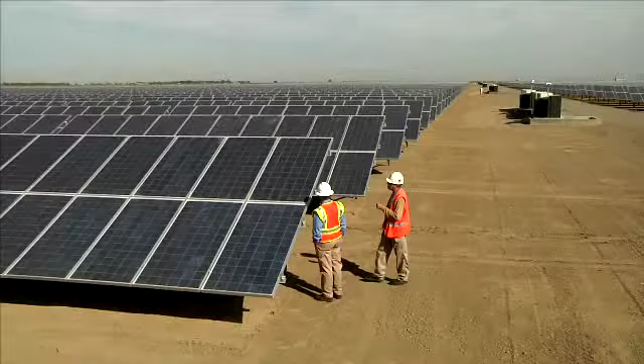On this edition of Our Green World, a company that specializes in storing renewable energy to help create the smart grid of the future.

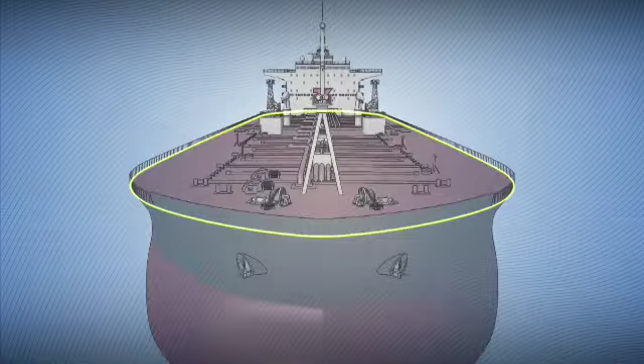Researchers show us the chemistry that makes our green living possible. But first, we take you to Vancouver, Canada, where the shipping industry has introduced a new design for the most energy-efficient ship on the seas.

Ocean shipping is the lifeblood of our global economy, but with the greening of the industry, future shipping is likely to be dramatically different than what it is today, especially for the next generation of tankers. Shipping overall is just such a huge industry, with 50,000 ships and 1 million seafarers transporting 90% of the world's goods. It's a big global industry.

And while it's one of the most efficient from a carbon emissions standpoint relative to other transportation methods such as rail or truck or air, as an industry we want to constantly evolve and have a smaller carbon footprint.

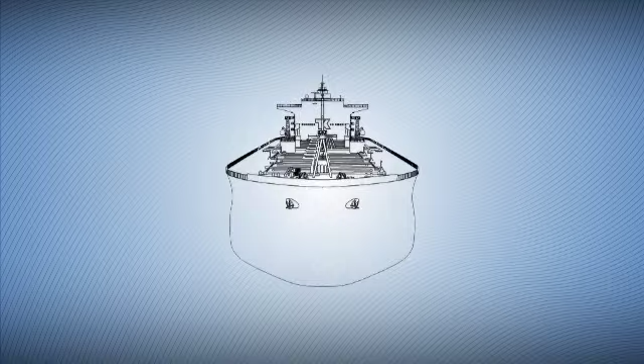New environmental legislation is underway, and shipping prices continue to rise. Since 1999, fuel prices have risen by over 500% and are now the greatest cost a vessel will incur over its lifetime. This means innovation in shipping is crucial for the future.

Fuel costs are every ship owner's number one cost. For example, if we were to order a new ship for $50 million, we would spend $250 million or more in fuel over its lifetime. So it makes economic sense as well as environmental sense to try to save fuel.

In the last decade, for sure, we've seen much more focus on the environment, and I think we've also seen the rising cost of fuel. And if you put those two together and take into account that we haven't seen any innovation, then it seemed like the perfect time to really start thinking about how you could do things differently.

As a world leader in shipping design, Teekay Corporation has taken upcoming emissions legislation and high fuel costs not only as a challenge, but as an opportunity to build the most energy-efficient ship possible, the One Spirit, an eco-design that reduces fuel consumption by 30%.

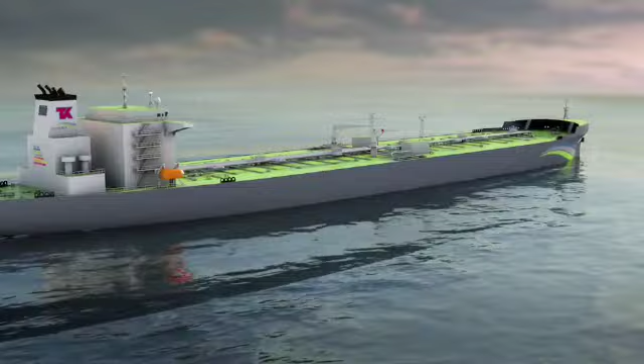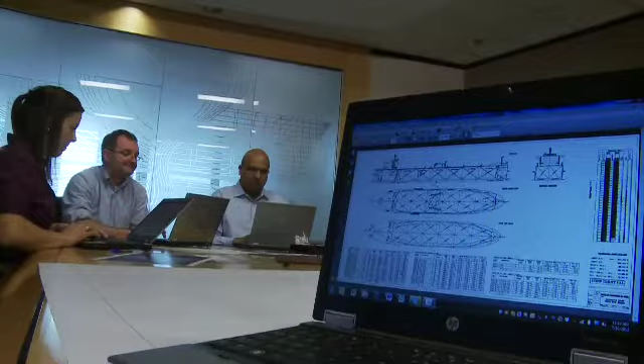While other shipping companies have developed eco-vessels by tweaking the design or doing simple add-ons like paint, Teekay took a far different approach by starting over and going right back to the drawing board on vessel fundamentals, here at its Innovation, Technology and Projects Unit in Vancouver.

So it made sense to go back to look at vessel design and alter it so that we were able to minimize the total life cost of the ship. So that's exactly what the team did.

Back in 2006, the project started off, and I think it showed great foresight by the project team, because they were able to look ahead and say, well, we don't believe fuel price is going to come down. If anything, fuel price is going to increase. So it makes sense to start to look at this project now.

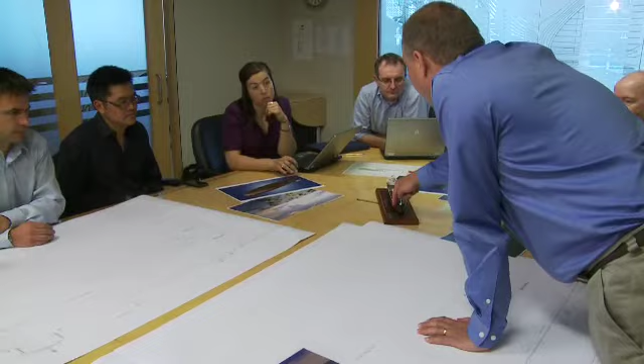And for a vessel design, it makes sense to go right back to where the rubber hits the road, so to speak. So we went back and we looked at the hull form, because that's where the ship interacts with the water first, is the shape of the hull. So if we were able to optimize the shape of the hull, then it gives us a very good platform to start to look at other innovations and other ways to reduce the fuel cost associated with the ship.

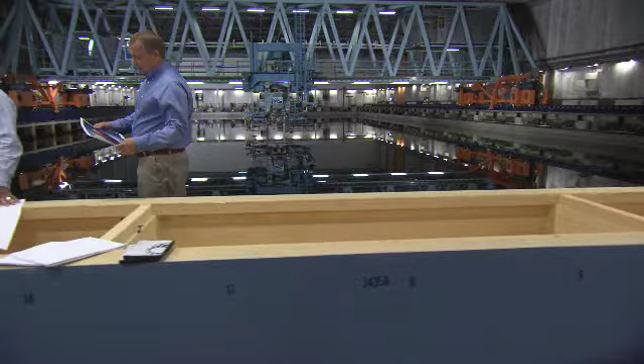Teekay then partnered with a world-renowned team of technical experts to create the tanker's ultimate design, undergoing rigorous tests at its testing facility here at Chalmers University in Gothenburg, Sweden.

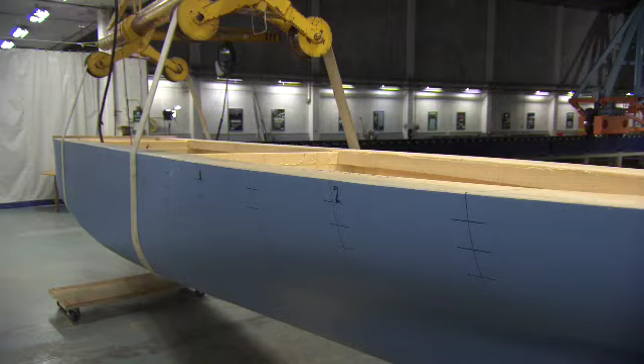You can only take it so far through paper and tabletop. We went through some computer development work, and that work indicated that we were heading in the right direction. But you can only go so far with that.

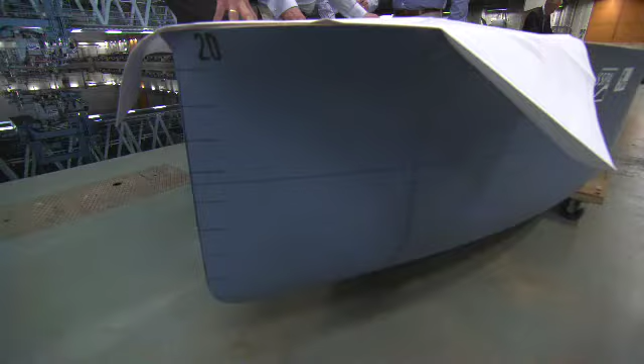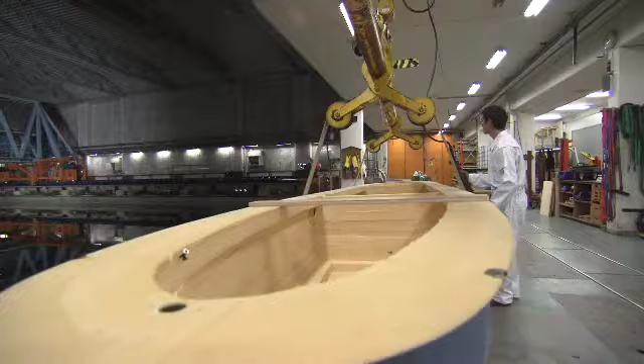What you need to do is put this into the real world. And to put it into the real world will cost a huge amount of money. But there are facilities such as this one behind us, where it allows you to build a scale model, put it in and start to see how it's reacting, and see if you're getting the savings that the computer indicated you were going to get. And that's what we're doing here today.

Well, because you have a facility here that allows you to simulate the exact same conditions, whether that be a hurricane or calm conditions, that you're likely to experience at sea. The end result is a tanker for the future called One Spirit.

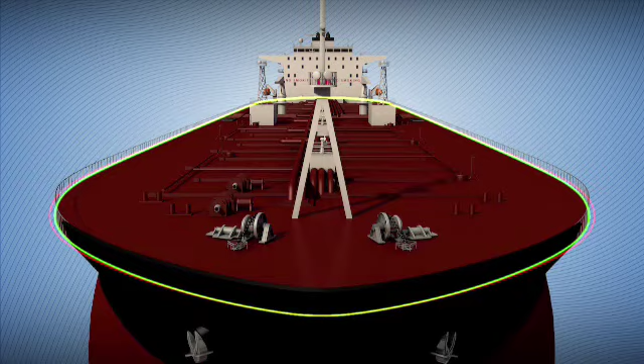This focuses on 3 key design innovations, starting with the all-important hull of the ship, for which the team ran over 40,000 simulations to find the optimal design that reduces resistance for a given cargo capacity.

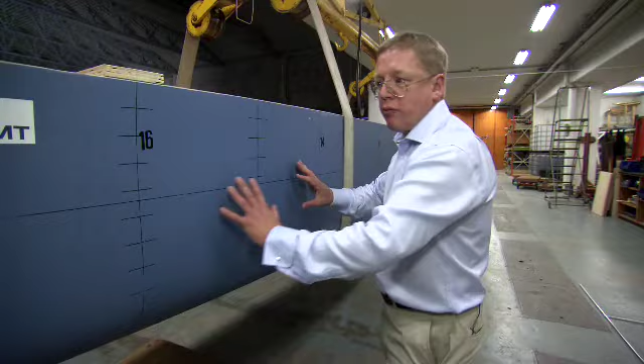On a conventional tanker, this portion is actually quite full, and the wave that comes round can dip down quite a lot, followed by a breaking wave. What we've done is made this portion much more gentle, so the wave coming around the corner manages to come back up without breaking. That contributes some 2 to 3% of the savings.

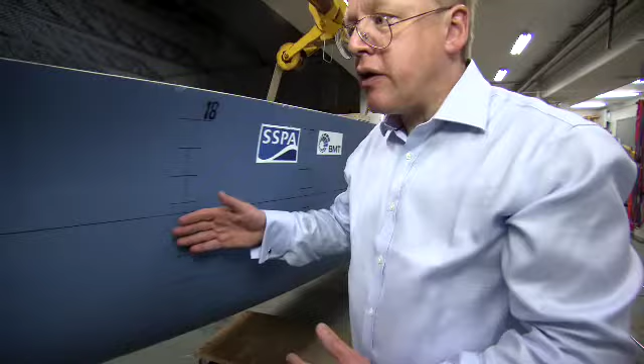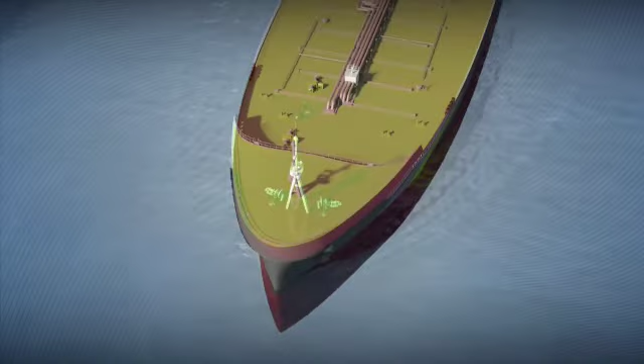Putting this all together, the savings in calm water are around 11%, with additional savings in a seaway due to the reduced added resistance in waves.

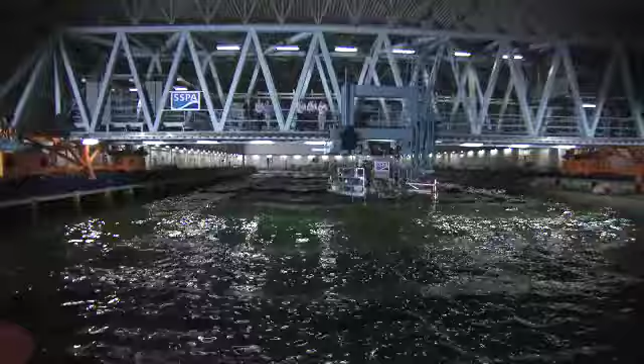By narrowing the beam of the ship and streamlining the bow and stern, the design team created a sleek new form that by itself resulted in over 10% fuel savings, while maintaining the cargo volume of the ship by increasing the hull's length and depth.

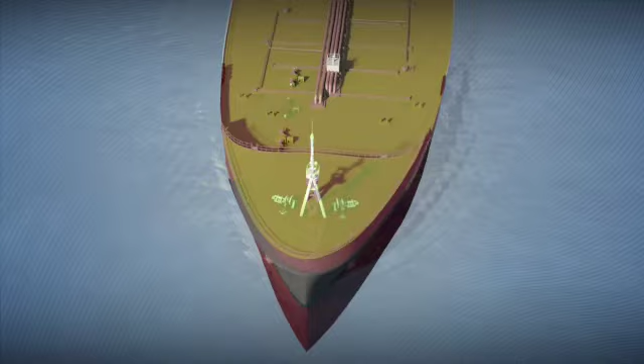The key thing about cargo carriage is it all comes down to $1 per ton or $1 per barrel freight cost. The quickest and single driver we can put in to reduce the $1 per barrel freight cost is to reduce the cost of the bunkers. And the fact that this ship is more environmentally efficient, significantly more environmentally efficient, it burns less fuel, has a direct impact on the landed cost of the cargo.

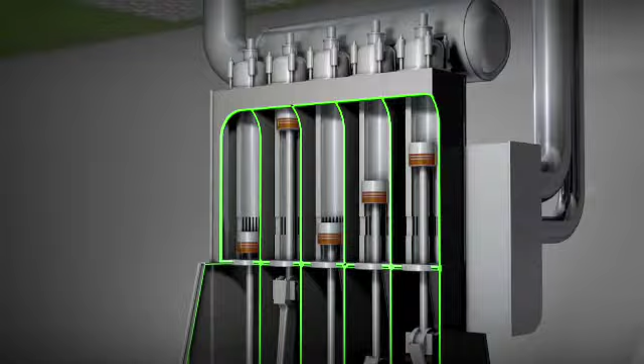The second innovation was adding a larger, more powerful G-type engine to the tanker, with increased capacity to slow the combustion process in order to recover more energy from fuel. So what we're willing to do is pay more money for a bigger engine, but that allows us to derate the engine, minimizing the fuel consumption.

The energy savings associated with this are sufficient to power 2,000 homes or to power 700 cars every day on the road. And if you expand that up into a fleet the size of Teekay, it's the equivalent of 42,000 cars being taken off the road every day.

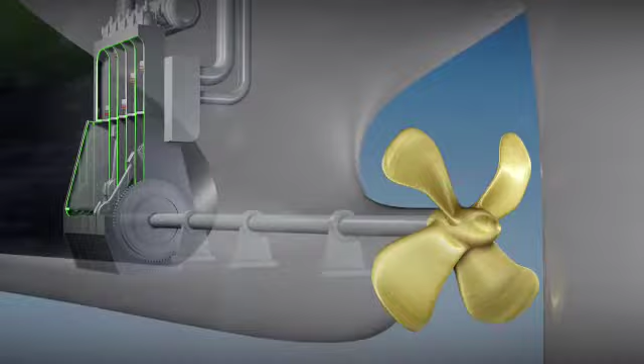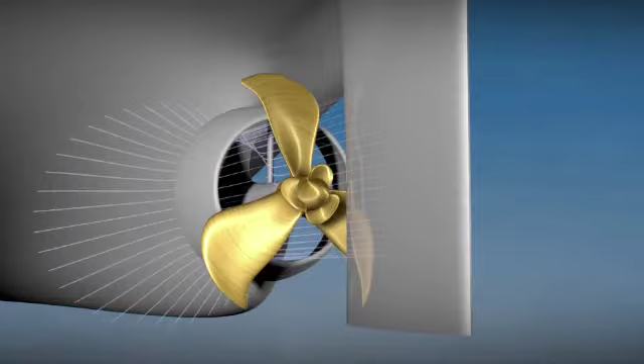The bigger engine and slower shaft speed resulted in a third important innovation: increasing the diameter of the propeller and reducing the number of blades from 4 to 3 to more efficiently move more water with each rotation. The basic thing we wanted to do was have as large a propeller as possible, because by the simple laws of physics, the larger the propeller, the more effective the propulsion.

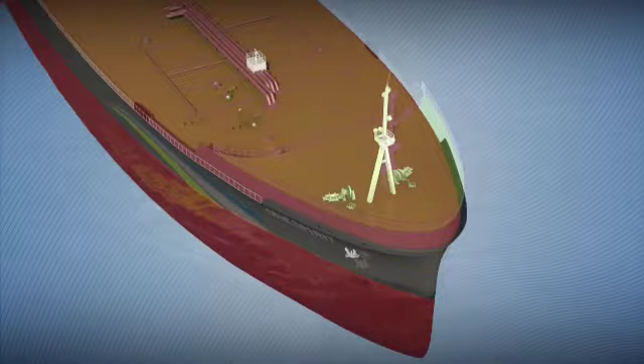Altogether, we have these 3 factors: the improved hull resistance, the improved propeller efficiency, and the improved engine efficiency, that have fitted together into what I would call a fantastically positive design spiral.

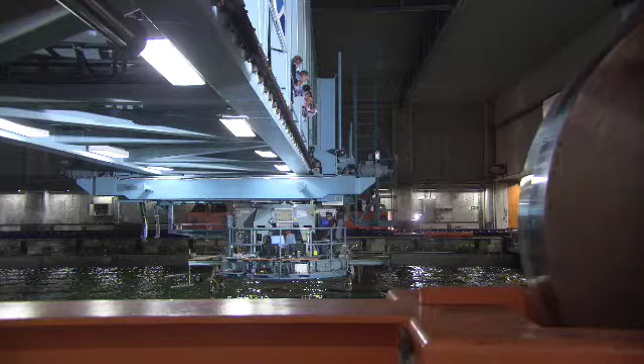This team and these 3 design advancements have all come together to create One Spirit, Teekay's newest green tanker, and the most efficient vessel in the shipping industry, with over 30% fuel savings.

This project is a hydrodynamicist's dream, to be approached to do a blank sheet of paper design study, and we've come up with what we feel is a world-beating solution.

Shipping is already the most efficient form of transportation out there. And what this ship does is take that and improve it - another 30% saving over what is already the most efficient form of transport in existence.

That's important to One Spirit customers like Teekay Tankers, with its fleet of vessels that transport crude oil around the world. Our goal is to provide energy to the world by being a leading provider in marine transportation. This ship that can save 30% in fuel will benefit our customers, our shareholders, and the environment. And so it makes just good business sense.

One Spirit may be the only green vessel of its kind, but it represents the next generation of tankers.

Renewable resources like wind and solar may be the symbols of green energy today, but harnessing and storing that energy is the key to powering our green world, and ultimately creating the smart grid of the future.

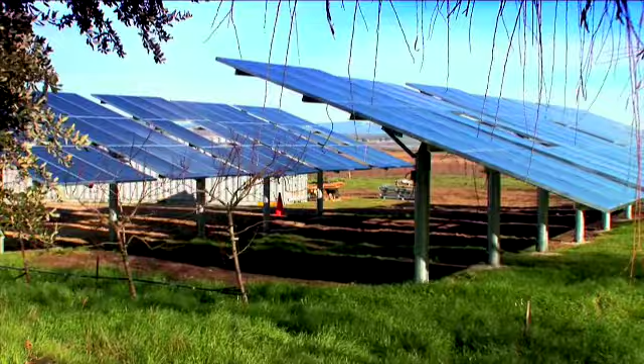Storing wind or solar-generated power is very important because both of those resources are intermittent. The sun shines through a few hours of the day, the wind blows intermittently, sometimes it doesn't blow at all. So the use of electricity requires a reliable source of electricity or power.

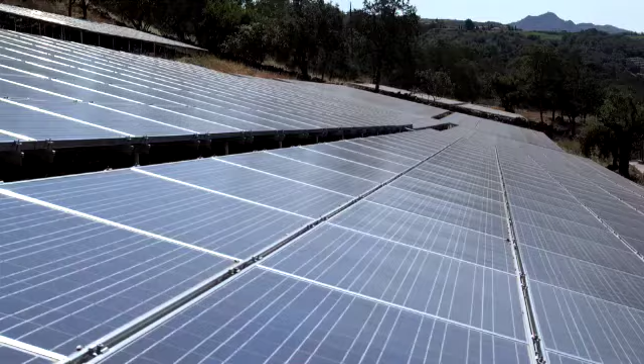The combination of having wind and solar generation allows you to have a clean, relatively inexpensive source of electricity. In combination with energy storage, this allows you to provide reliability, so the electricity is there whether the wind's blowing or the sun is shining. The future of powering our cities and businesses resides in the ability to provide large-scale energy storage and power management.

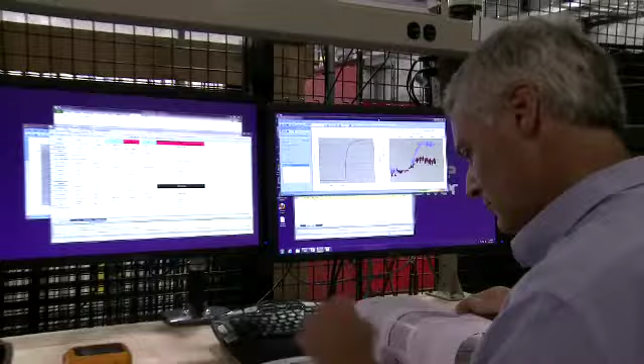It means Xtreme Power, which is the very name of the industry leader in the energy storage market. Here at its headquarters in Austin, Texas, and its Kyle Operations Center, the business of designing and integrating power management takes place.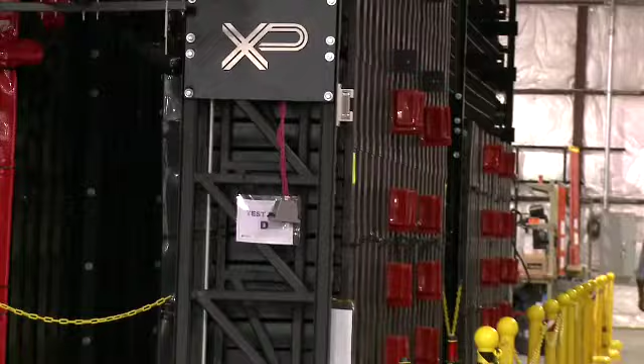For communities and providing solutions for massive energy storage is the round-the-clock mission of Extreme Power's team of engineers and technicians. What sets apart Extreme Power is our ability to take software and engineering integration skills to use multiple energy storage chemistries, combine them with power electronics to provide grid-scale, multi-megawatt capabilities to store electricity and deliver it on demand, real time to the grid.

The power capability of this DC block is pretty incredible. I mean, really we're limited by the size of our front-end converter. But a general setup like this would be enough to power 500 homes.

Since its beginning in 2004, Extreme Power has been installing power onto the grid across multiple projects around the country, including their pilot project in the Hawaiian Islands that supported the energy output of a 30-megawatt wind farm.

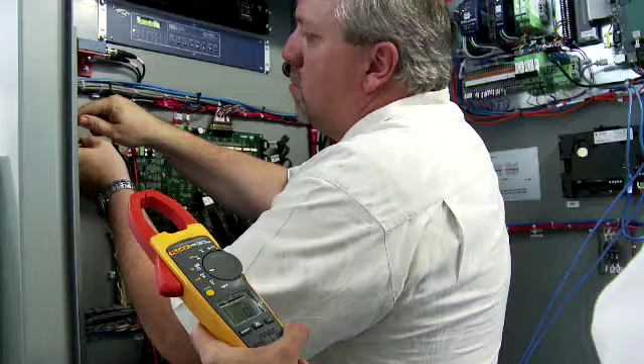The use of wind and solar in Hawaii allows them to use a renewable, clean source of energy, but it's intermittent. And what we do is store electricity from either wind or solar-generated sites so that we can smooth and firm, meaning provide electricity when it's needed, whether the sun's shining or whether the wind's blowing.

For remote islands, being that their grids are unstable, having an energy storage system that Extreme Power supplies is pretty important because it gives them a very stable power source.

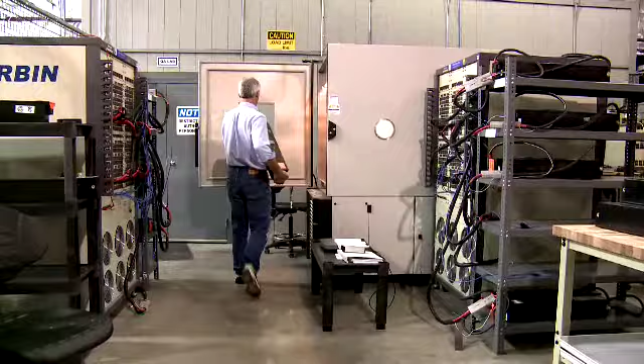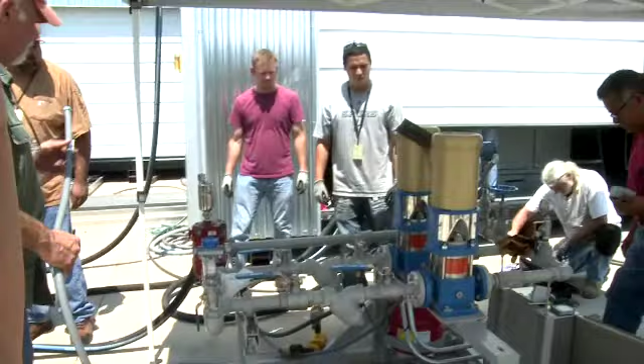Extreme Power's unique energy storage system, known as the Dynamic Power Resource, has now spread across a dozen more projects, enabling clean energy resources to deliver more power onto the grid reliably and efficiently. It's through Extreme Power's complete integration and system controls expertise that each project is able to overcome grid challenges, whether they're on remote islands or in congested load centers of a city.

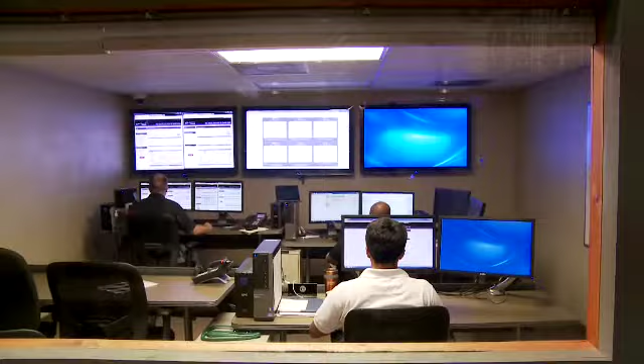Here at its Operations Center in Kyle, Texas, all of Extreme Power's field installations are under microsecond control and analyzed around the clock. The Operations Control Center here is very critical.

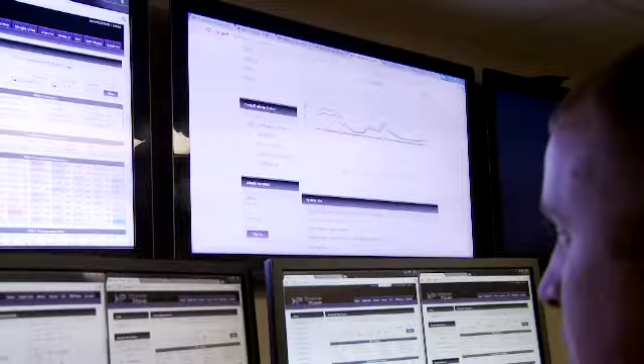A lot of the applications that we're going into are dealing with utilities, the power grid, which as we know has a very high level of reliability required. So we're able to offer that sort of utility grade reliability that's expected, not only through proper design of our systems, but having a 24/7 monitoring center here that can respond very, very quickly to any sort of anomalies or any sort of event that we see anywhere at one of our sites.

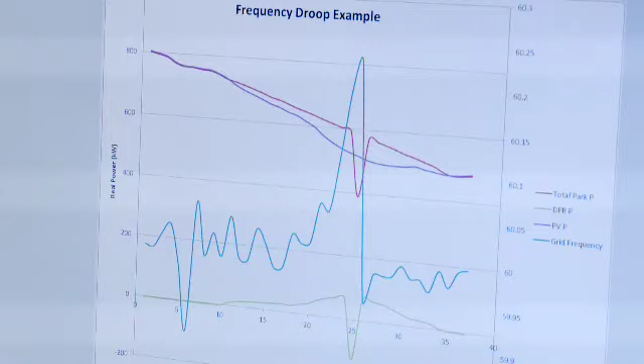This is also where any grid challenge or problem can be simulated in software, so it can be tested with actual hardware before ever going to the field.

Most of our sites have demands for very high levels of reliability, utility grade sort of assets we're providing. So we're able to provide this level of reliability that's expected by having this room constantly manned, and we're constantly watching our sites for any sort of events or disturbances that may occur.

Energy storage has the potential to become a $125 billion market on a global basis, and Extreme Power hopes to become the backbone of the 21st century grid.

Extreme Power wants to provide clean energy on demand anywhere in the world. And we have projects on the drawing board now for China, Japan, Korea, Thailand, Malaysia.

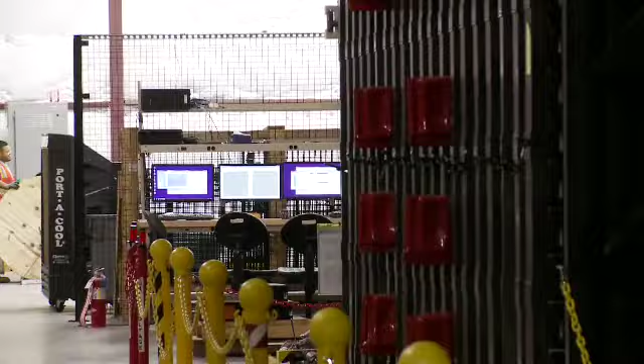So wherever you see the sun shine and the wind blow or you need grid support, these are areas where Extreme Power's Dynamic Power Resource can give you this real-time control to provide a reliable source of electricity from renewable generation sites that are powered by wind and solar.

Storing clean, renewable energy will be the future for powering our green world, thanks to the innovative technology of Extreme Power.

Next up, from wind turbines to laundry detergent, it's high-performance chemistry that is truly powering our green world.

Ultimately, it's the energy of the sun that produces our renewable resources to power our green economy. But today, man's innovation is aimed at sustainability in using these resources in all facets of our lives.

This is especially true at Huntsman, one of the world's largest chemical companies, which has been building a sustainable future through chemical research for more than 40 years. Producing over 33 billion pounds of products for a multitude of global businesses, Huntsman has a clear vision of its journey ahead to enrich lives through innovation.

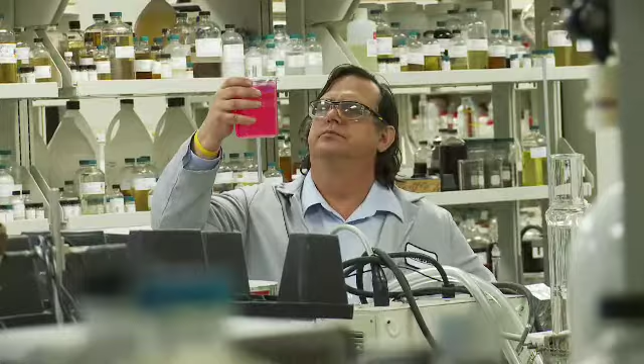It's extremely exciting. I mean, if you take just a look at all the different projects that we have in development that are either related to sustainability or to green chemistry. Well, we see a better world being created by our innovations, which help to protect the environment.

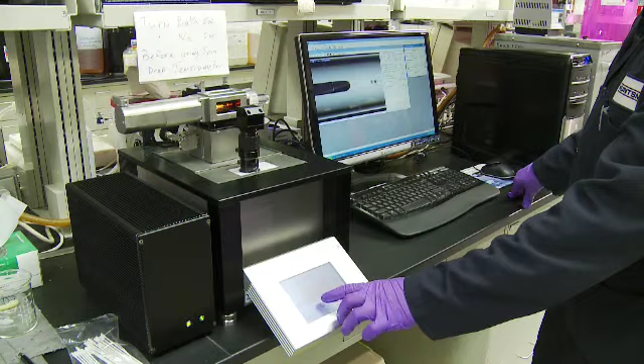We allocate over $150 million annually and dedicate over 1,000 scientists and engineers at R&D facilities around the world to drive innovation. Huntsman's Performance Products Division is working hard to help create a green economy.

One of the keys to a green economy is the ability to manage the life cycle of CO2, since it's a product of energy usage and a source of carbon for renewable resources. Here at the Huntsman Advanced Technology Center in Houston, Texas, scientists are looking for methods to capture and store carbon for use in other applications to power our green economy.

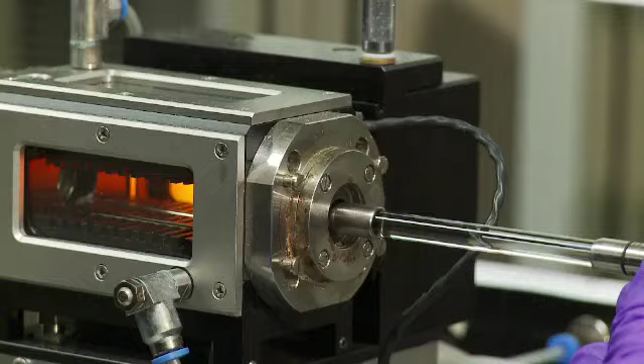To capture carbon in the form of carbon dioxide, you would take, for example, flue gas, which is an exhaust stream coming off of a power plant, and you would take a chemical that we manufacture, put them in contact with each other, and it absorbs the CO2. Then you pass it to another piece of equipment where you heat it and it releases the CO2. Now you have a pure CO2 stream that you can capture and compress.

Once it's compressed, you can use it as feedstock for another chemical, or you can inject it underground and do something like enhanced oil recovery. Or you could simply store it into a deep geologic formation.

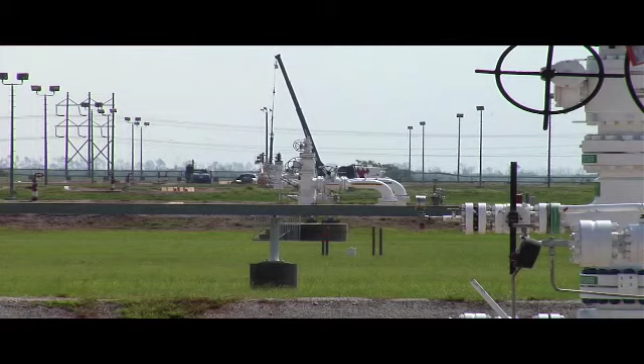When CO2 is used for enhanced oil recovery, it's estimated that it can help recover up to one-third more of the oil in the ground. In a typical oil reservoir, less than one-third of the original oil in place is recovered. But producers have discovered that pumping high-pressure CO2 into the well will thin the oil so that it can more easily flow to the producing wells.

We actually add surfactants to the carbon dioxide that is injected into an oil well. What happens is that the surfactant foams, and it helps produce a sweeping effect of the oil, allowing more oil to be recovered out of an existing oil reservoir.

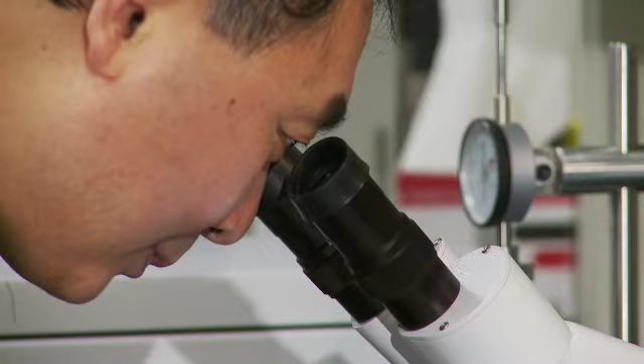Through its research, Huntsman has also developed a family of molecules called cyclic carbonates that are made from CO2. In addition to their sustainability impact of sequestering CO2, these molecules are also essential components in the all-important lithium-ion batteries that are key enabling solutions to our energy needs, both in transportation and renewable energy.

If you break open one of these lithium-ion batteries and take a look at it, it's really chemistry that makes these things work. Part of the chemistry that's critical for the proper operation of a battery is getting the lithium to migrate from one electrode to the other. That's done with a solvent, an electrolyte solvent system, of which we supply a critical component that enables the lithium to migrate back and forth across the battery.

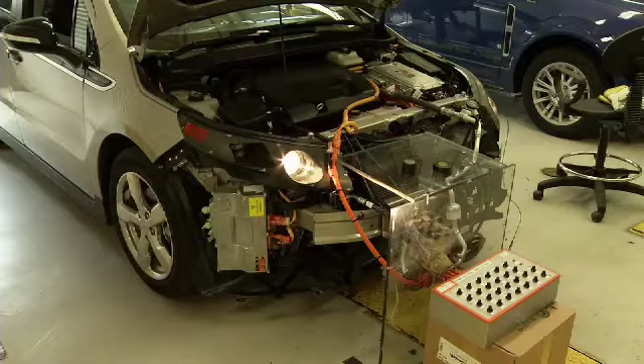Lithium-ion batteries also provide a safe and efficient means of storing renewable energy, so this renewable source can be captured, stored, and supplied to the grid whenever it's needed. The Green Energy blog has written that advanced, economical energy storage is the most disruptive thing to hit the grid in the last 100 years. The US Department of Energy has written that advanced energy storage will be a $175 billion impact on the United States over the next 10 years.

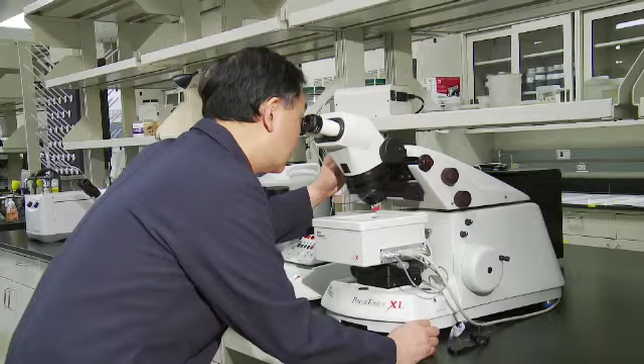Chemical research is also underway at Huntsman to help in the field of wind energy. Wind is a sustainable and clean source of energy that does not release emissions and does not require water for cooling, while the industry is working to develop larger wind turbines capable of producing more energy.

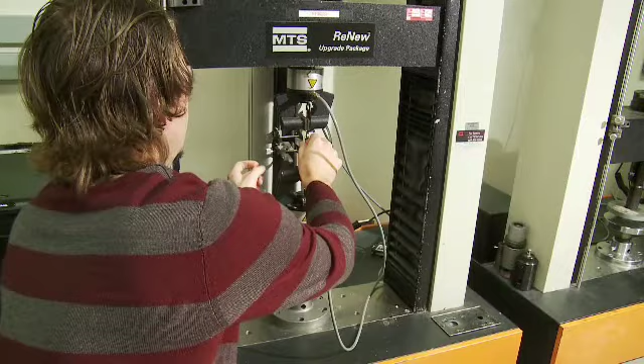Huntsman is working with blade manufacturers to develop new curatives to create longer, stronger wind blades. The blades on a wind turbine are routinely manufactured by infusing glass fibers with a resin such as an epoxy. Here at Huntsman, we pioneered the development and production of the key materials that help the epoxy resins cure and form a very light but also very strong structure.

And this technology is what has enabled blade producers to make ever larger, bigger, stronger blades to place on turbines. It's also the technology being used by the aerospace industry to make airplanes lighter.

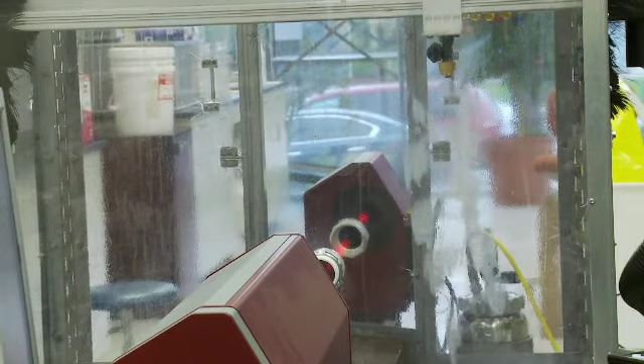Finally, as a global manufacturer of surfactants, Huntsman is producing molecules from renewable resources that will increase the effectiveness of pesticides at the smallest possible doses for crop protection, enabling more efficient and sustainable farming, as well as using biomass to make green and sustainable products in the detergent and cleaning markets.

You won't see a Huntsman brand laundry detergent on the market, but we make ingredients that go into virtually all of these products. People like me spend their whole life studying the behavior of the ingredients that go into these to get the best cleaning efficacy at the lowest price.

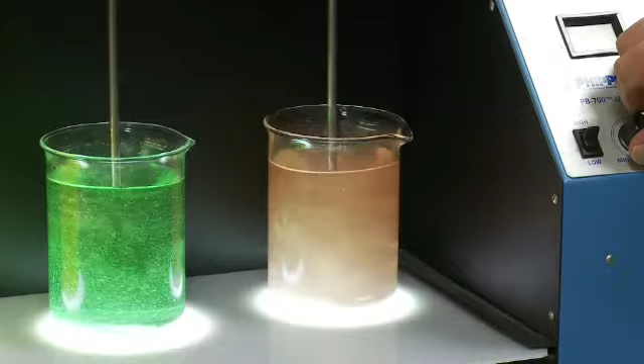I would say that the detergent industry is at the forefront of this green movement that's going on. It's a big initiative for Huntsman to look at renewable feedstocks that are locally grown and don't impact the food chain for human beings.

I would say that somebody would be hard-pressed to go through more than 30 minutes of their life and not have something that Huntsman has some direct or indirect impact. It's very exciting to see us develop these chemistries that contribute to the green economy, that contribute to sustainability, and it's part of our vision as a company to build a better world.

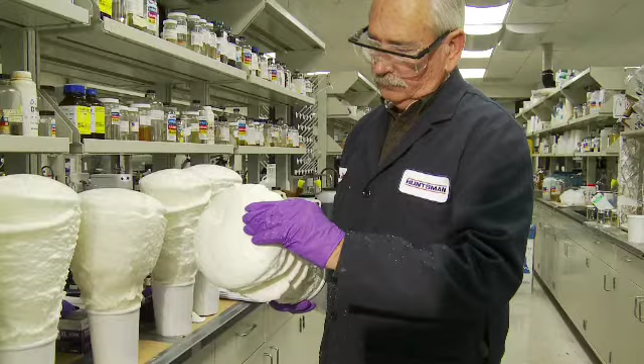It's impossible to know how much oil and gas exist or what will happen with climate change. However, by developing renewable products today, Huntsman is paving the way for a sustainable future. Finally, an American company that has made energy efficiency its number one priority, softening the carbon footprint of manufacturing today.

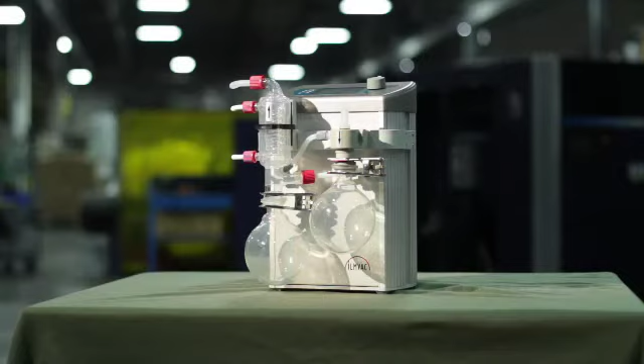Oil prices are heading up and up. We all know it when we fill our cars. But just think about all the other ways we use oil that isn't readily apparent. Gardner Denver is thinking about that a lot, and they're also thinking about ways to reduce the impact of machinery on the environment. The result of their innovation is a host of new products creating a stir in the manufacturing industry.

You can't believe how many places air compressors are used. You don't see them all the time, but these giant machines help improve our lives every day, from keeping our drinking water clean and safe to use in food factories and automobile plants. It might not look like anything too unique from the outset, but it is changing the way manufacturing plants are operated worldwide.

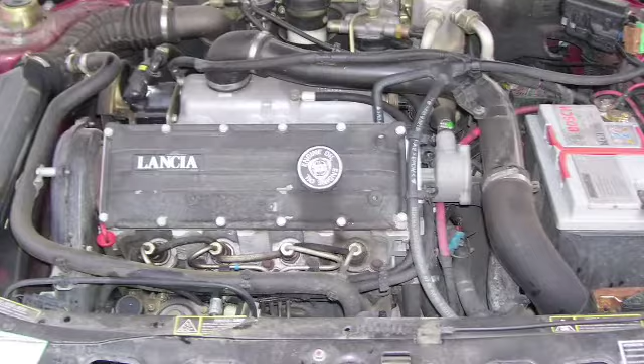First, picture a regular motor that has gears and traditional bearings that move together to generate power. To keep those parts moving easily, you need a supply of oil for lubrication. Production facilities might spend millions of dollars a year on oil, while at the same time polluting the environment. So imagine now what a gearless motor would do: no gears, no oil. Oil-free also means the air is free of contaminants.

That, in essence, is the Quantima. The Quantima is an air compressor designed around a high-speed motor and active magnetic bearings. This design essentially eliminates the requirement for gearing and traditional bearings, so as a result there's no need for any oil in the package whatsoever. This is obviously a cost savings to the customer and is good for the environment.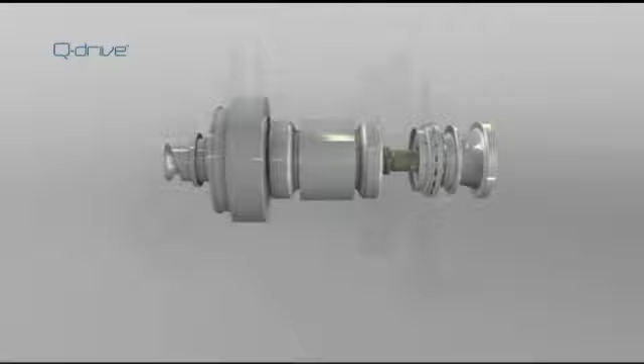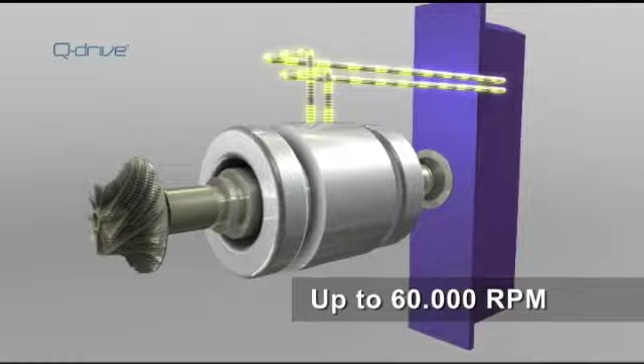The Quantima motor is made up of a single moving part and has no mechanical contact, so there is no wear and tear. The Quantima also automatically senses the compressed air needs of its location at any time and adjusts its output accordingly. To date, this two-stage centrifugal compressor offers the lowest possible energy use and associated carbon impact over the product life. In fact, customers are realizing energy savings of 25% and more.

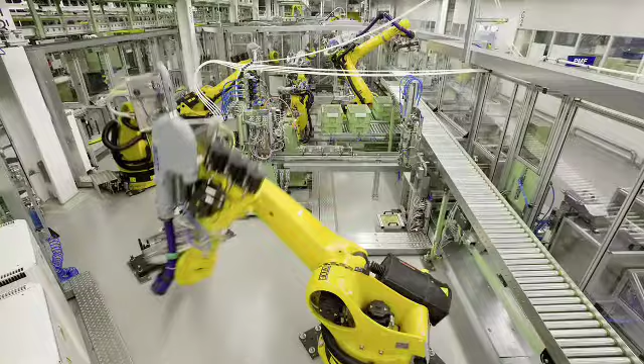One prominent place the Quantima is used today is at the tallest fountain in the world, the magnificent Dubai Fountain. Four Quantima units and several other Compair compressors propel the water 50 stories into the air. And when Daimler-Benz installed the Quantima in a plant, the energy savings were 5% higher than originally forecast. The Quantima is also used to help manufacture the prestigious Jaguar brand automobile.

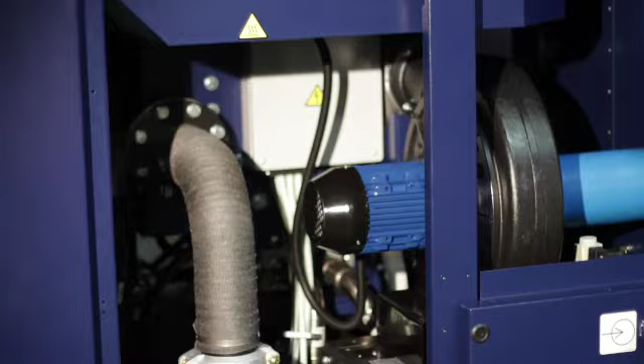We have many customers that count on us to help them reduce their carbon footprint, increase efficiency, and improve their energy savings. Since 80% or more of the total life cycle cost of operating an air compressor is energy, energy efficiency is our number one priority. The Quantima is so innovative, it won the prestigious 2008 Product of the Year award from Plant Engineering magazine.

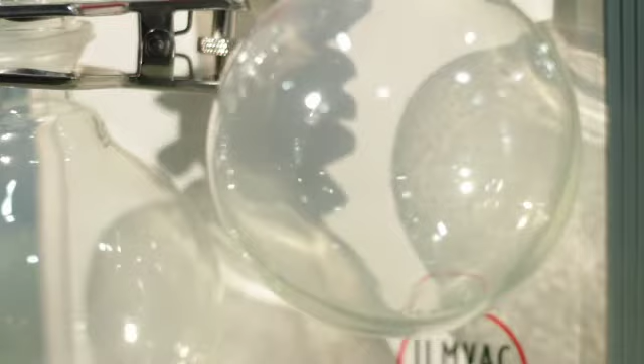But Gardner Denver isn't stopping there. Their division called Welch ILMVAC has created a new industrial vacuum that is all green. Its main use is for chemical researchers who need to remove solvents with as little heat as possible during the synthesizing of new molecules. This technology is called EcoFlex. It is the most sophisticated and environmentally friendly laboratory vacuum system on the market, developed to minimize the impact on the environment.

You can't talk about green innovation in processing without saluting the Hoffman Revolution. This new line of high-speed centrifugal blowers was named Breakthrough Product of the Year for 2010 by Processing Magazine. The Hoffman Revolution is all-American designed and made, and it delivers a whopping 45% energy savings.

Well, the Revolution doesn't lose efficiency across changing demands like traditional blowers. Our performance curve actually moves with those changing demands and maintains the highest efficiency possible. We're able to do this by combining advanced technologies such as a permanent magnet motor, among the highest efficient motors manufactured today. We complement that with a high-efficient speed controller, and we wrap that around an active magnetic smart bearing that actually communicates the precision of the speed at tens of thousands of RPMs, and the actual location of the impeller and shaft relationship.

We're all working together for a sustainable future. Join us next time on Our Green World.